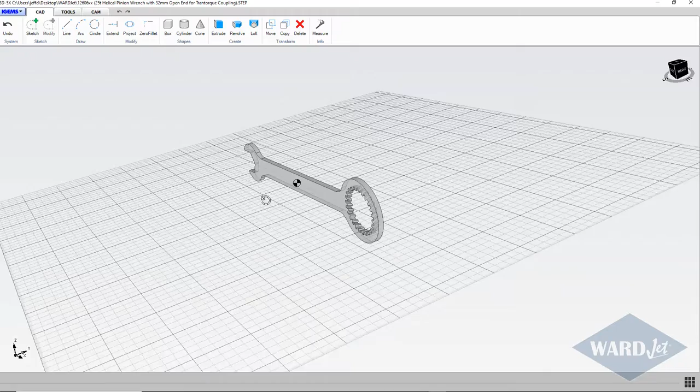Usually when you bring in parts, especially ones drawn in SolidWorks, they come in on edge like this. So on our cam tab we'll use the ground button, pick a surface, and lay that down on the table.

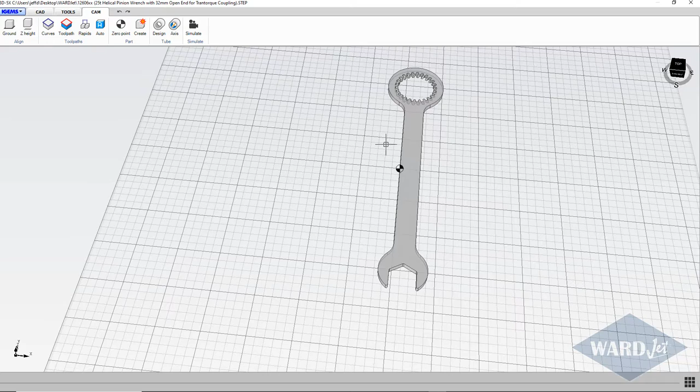Right now that's how it would be oriented on the table. If I want, I could rotate it 90 degrees in here to cut it left to right, or do that later. So if I wanted to rotate it in here, I can come to the align button and rotate, and we're going to rotate it around the z-axis. Now it'll cut like that on the table.

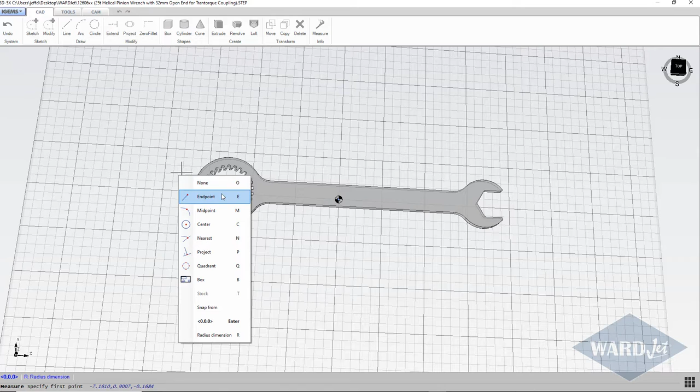We have a measure command if we want to check how big this part is. I can right click and choose various snap points. I'll go with nearest and grab something out here for an approximate distance, and grab something over here. So we see this part's about 14 inches long, so we don't really have to worry about it falling into the tank, and we don't need any tabs.

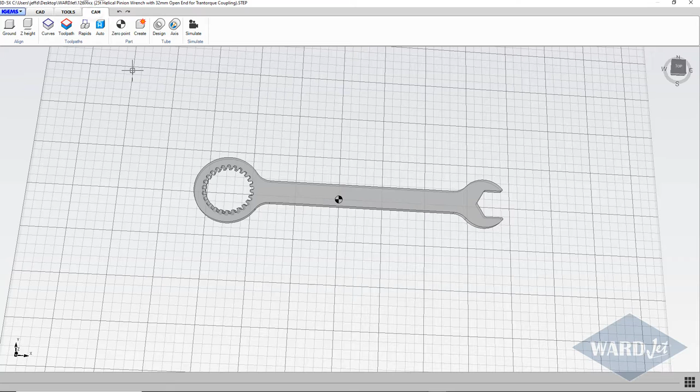So first we'll try the auto button and see how that goes. We'll do all the cuts, linear piercing. We'll do tilted piercing since it's 1/4 inch thick, so it won't take too long to pierce through.

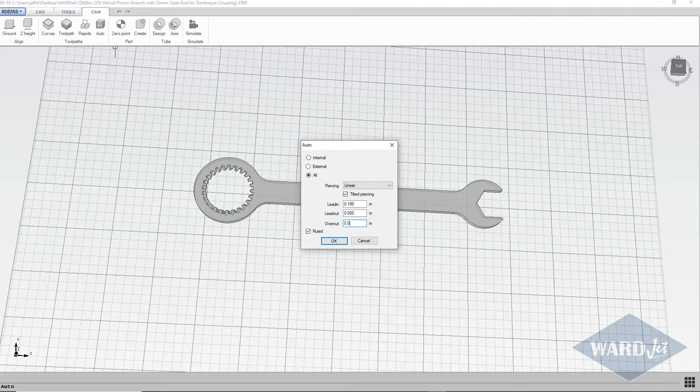We've got our lead-in length, and we don't need any tabs on here because of the size of the part, so we'll zero that out. If we want to cut past where we lead in a little bit, we can put a little bit of overcut on there.

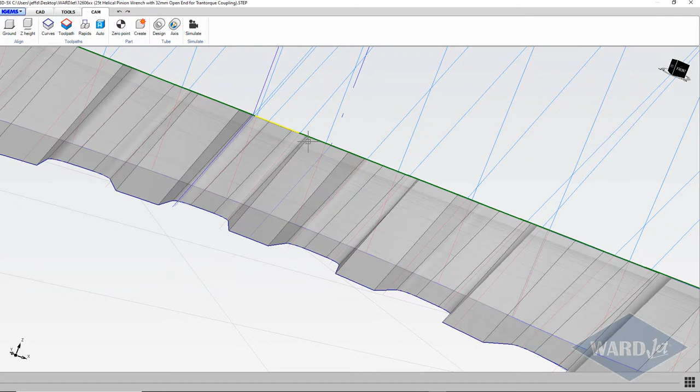So it'll go through and find the edges. The outside cut is a vertical cut, and on the teeth we've got the angle there, and you can see how that angle changes. It starts out at this angle and then changes as it goes along there.

Now it's probably not a great position for the lead-in, so we can go ahead and change that. We'll go into our toolpath area here. We've got our two cuts, which we can rename if we want.

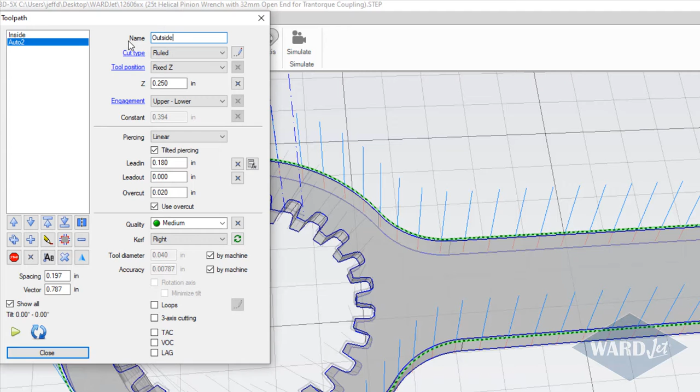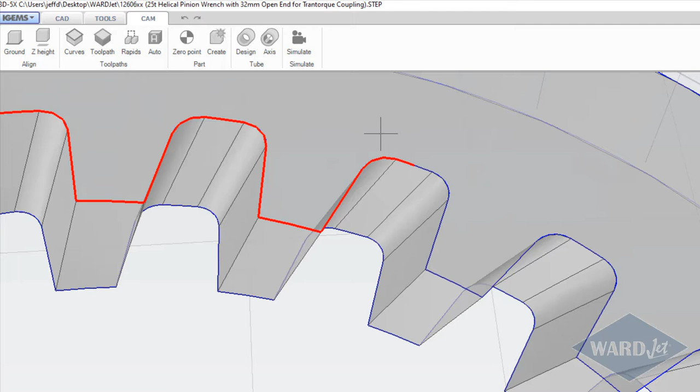On the inside cut, if we want to change our lead position, we have to delete the cut. So we'll delete that and use our plus button to re-add it. Upper curve will be this, and we'll pierce right there. Then we'll hit enter to go all the way around this, go in this direction, and grab that for the lower curve. Then for a lead-in, we'll hit enter when our line snaps in right there.

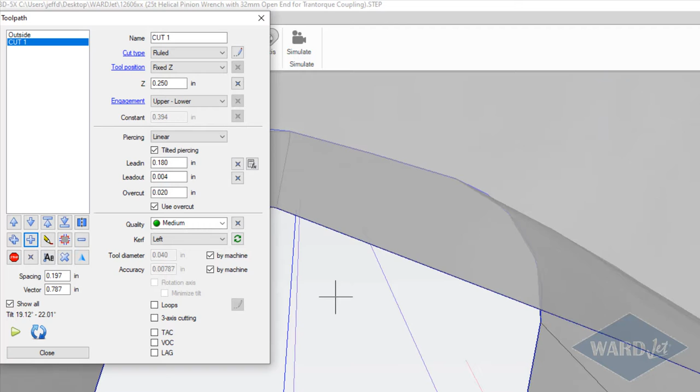And for our lead out, if we want a little bit of lead out, we can hover our mouse out here and left click. So we got 0.18 for our lead in, 0.02 for lead out to give ourselves a little bit more, and then 20 thousandths over travel.

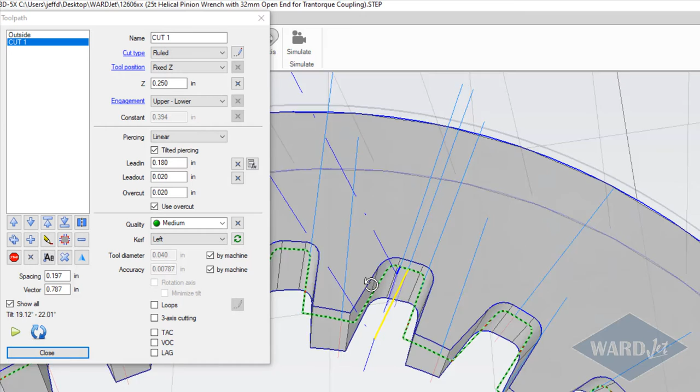Kerf is on the left. This cut is medium, being that it's going on the pinion gear. Let's go ahead and make that a little bit better quality. I can click here, change that to extra fine, and kerf is on the left, and that's good. We can see the line, so this should be properly sized.

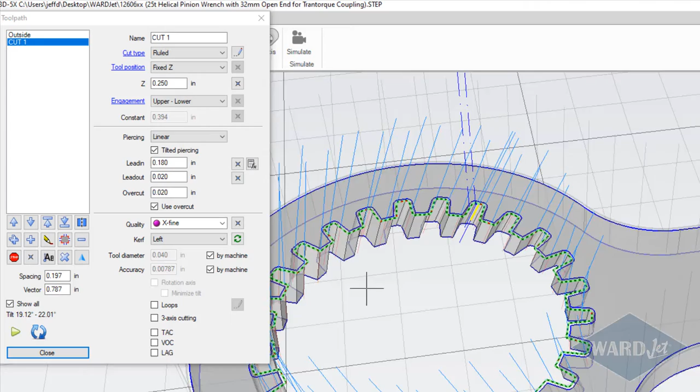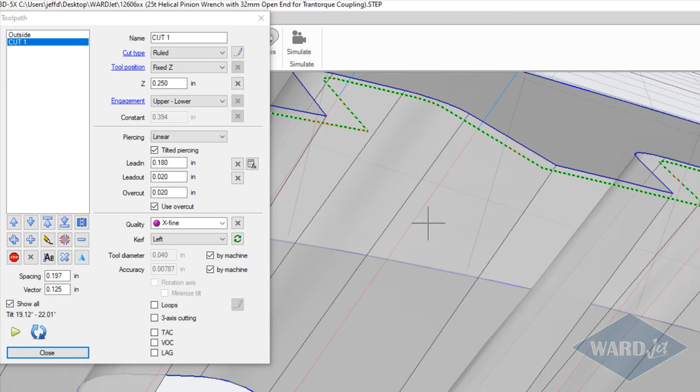The spacing and vector boxes here control the length of the different lines that we have here. The vector box controls the length of these blue lines that project up off the surface. If those get in the way a bit, you can shorten that up. The spacing controls the distance of these red lines, so if you wanted more of those, you can change that number also.

You'll note since I deleted the original inside cut and added it, it now happens after the outside cut, so we want to make sure we reorder that, and then we'll rename this.

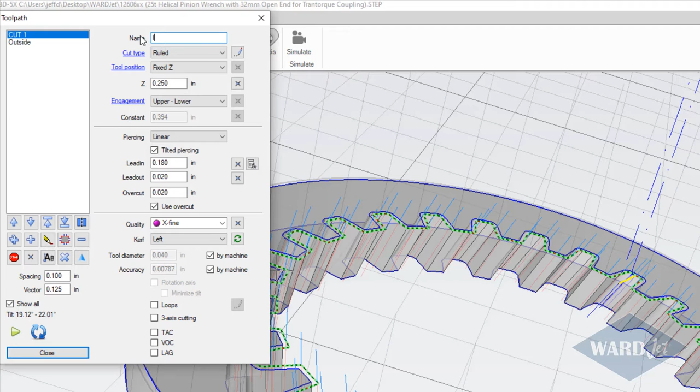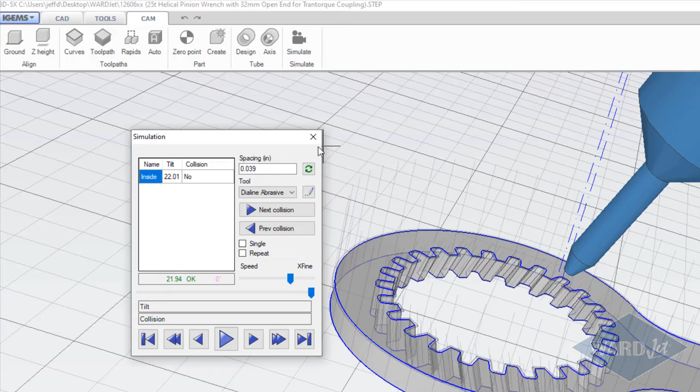And then we can do a simulation by clicking on the green button here. We can speed it up or slow it down. Okay, that looks good.

So we'll go ahead and close out of here. Right now for our rapids between the cuts, it's going to the top of the z-axis travel. If we want to reduce that, we can click on the rapids button, and we'll just lift 1/2 inch between the cuts.

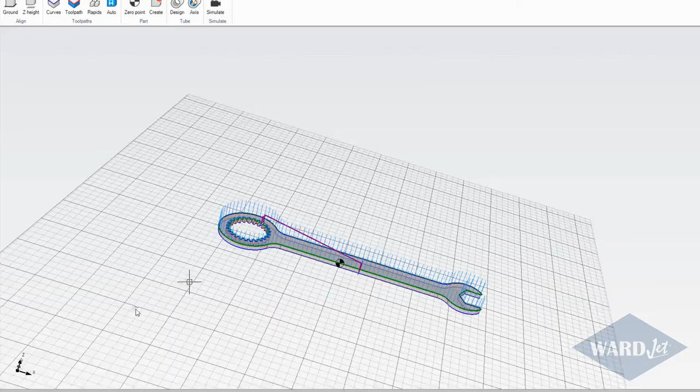Finally we should set our 0 point somewhere on the top of the material. Right now it's at the top of the table, so we'll go ahead and click on our 0 point button. For a part like this where you don't have any square corners to place your 0 point, you can right click and choose box down here. We'll go for this top lower left hand corner here, so that'll put it at the lower left hand corner at the top of the material.

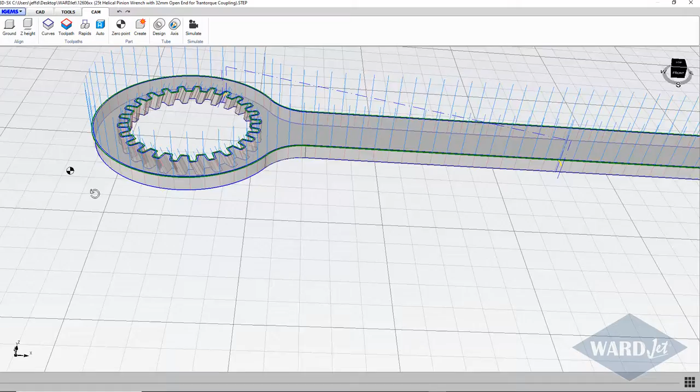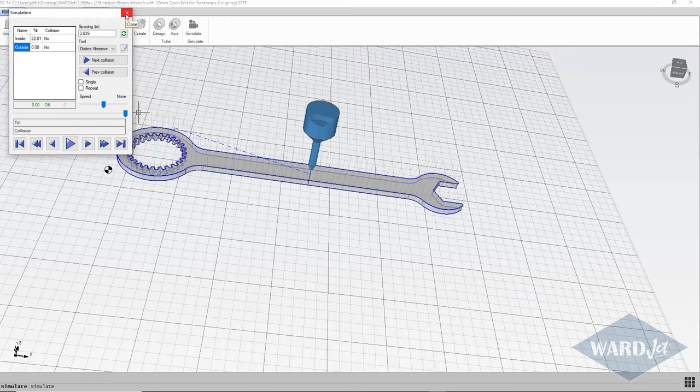And then we can do a full simulation if we want. This will show us the inside and outside cuts. And if that all looks good, then we can go ahead and create the part.

If we click on this file name button here, it'll pick up the name of the original file, and then OK.

So now we can set our 0 point for the part, and then always click this part button here, and you'll pick up that proper Z height that we established back in the 3D area. And then we can go ahead and process.

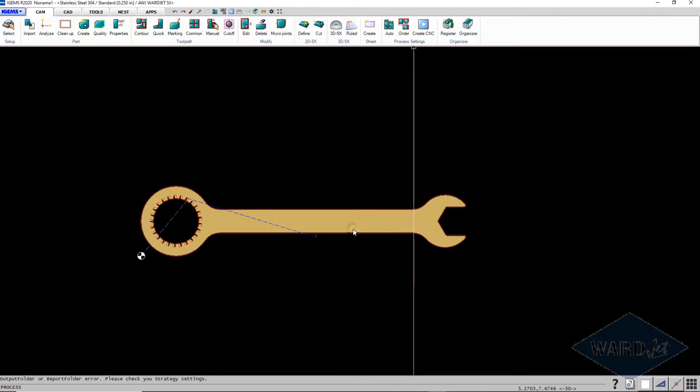So at the beginning of the program, we're going to lift 1 inch, wrap it over, tilt, come down, and pierce.

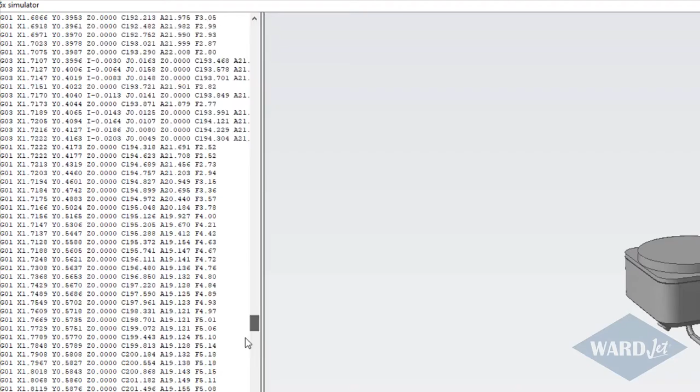And then between the cuts, right here, we'll lift up 1/2 inch, wrap it over, straighten out, and then come down.

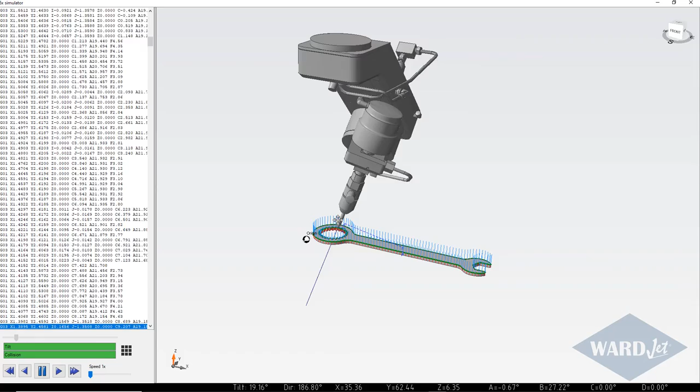So as we're watching this, we're just looking for any erratic head movements that we don't expect. This all looks good so far. We can speed it up.

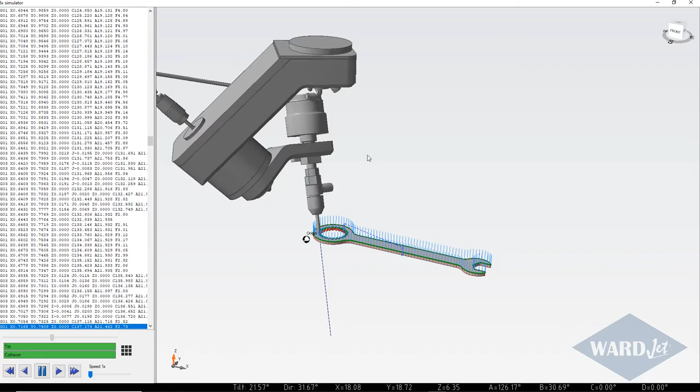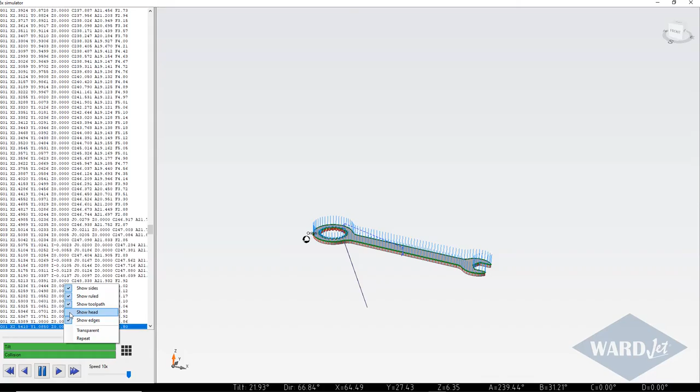Down here you also have options that you can toggle on and off. You've got a little control up here that you can quickly spin around.

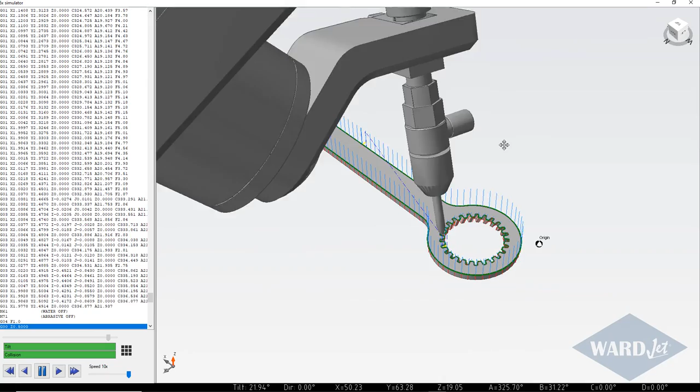And that all looks good. So at this point I can go ahead, click on this button here and create my CNC file and give it a try. Any questions, let me know. Thanks.